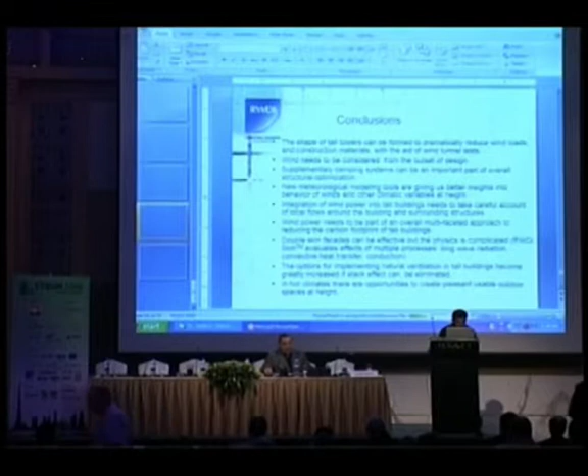Professor Land has formal qualifications in architecture and in city planning. He is a researcher of international renown. He is at the Illinois Institute of Technology, and he directly leads research groups in both the College of Architecture and in the Aerospace Engineering Department at the Institute. So if I could please welcome Professor Land to the stage.

Very interestingly, Peter is very, very experienced in wind in relation to our industry, but Peter was also telling me about his passion for ice yachts. 150 miles per hour, is that right? Up to 150 miles per hour, these things. Now, this is a level of experience, and it's a very interesting thing. I hope that you can incorporate a little bit about your experiences of that and how that relates to the work in our industry. Professor Peter Land.

I don't want to come over as a playboy, so I'm not talking much about my yachting experience, but as a boy I was brought up on a sailing boat, and I've been involved with sailing boats all my life. And since I came to the Midwest, almost 30 years ago, I've been very active in racing ice yachts on the Wisconsin lakes. In fact, I gave up 2 weekends to come here, and I'm missing probably the 2 last weekends of the ice boating season.

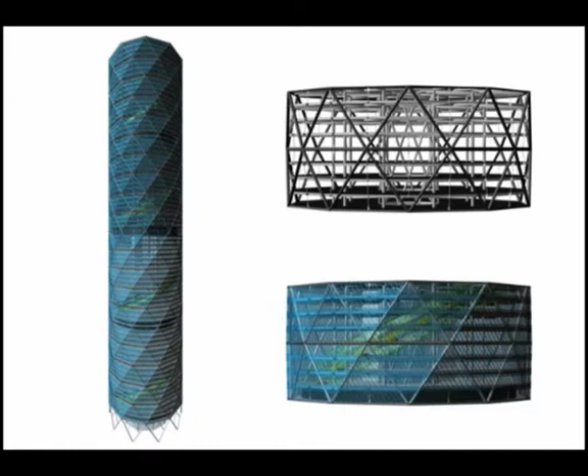So we've applied the loads at the nodes of these inclined columns. If you look carefully, you can see there's a hanger coming down here, and it goes all the way down, and it stops there. So all the perimeter plate loads are transferred to these nodes and distributed neatly throughout the exoskeleton. We thought that was an important breakthrough for this type of structural concept.

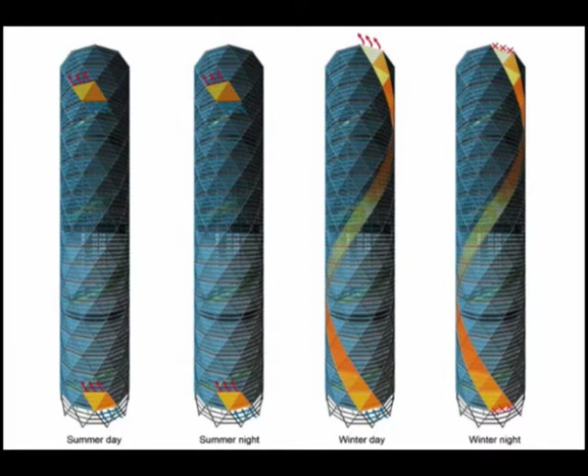And then energy-wise, this is an 80 centimeter to 1 meter double skin facade here, and in that cavity there is a swirling landscaped band, following some of the ideas of Ken Yeang, and the air is guided through the cavity of the double skin and swirls around the building in this fashion. This is a scheme for temperate climates, Chicago specifically.

This would be the temperature build-up in the wintertime. The air swirls around the facade, guided by the inclined louvers inside the double skin facade, which by the way also contain the photovoltaics, which drive the fans, which encourage this air movement. In the wintertime day, the shutters at the bottom of the cavity are opened, which permit the hot air to swirl around, and when the sun goes down, the whole building is encased in a jacket of hot air, and it's closed off in the night, and that will stay at that temperature for some hours. We've calculated.

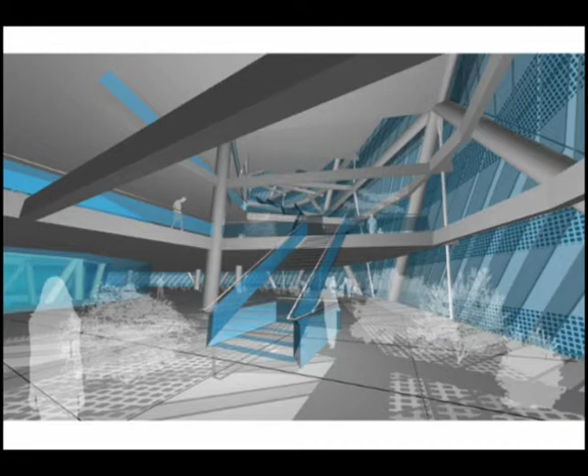During the summertime, you want to shed the accumulation of hot air in that double skin facade. So you open these ventilators, which quickly evacuate the hot air every four stories. Now this shows the photovoltaics on the spandrel panels outside, and also these are the angled louvers, which will also have photovoltaics on them at a decent angle to the incoming solar radiation. You can see some of the bracing inside there. Well, this is some of the many types of experimental structures we're developing.

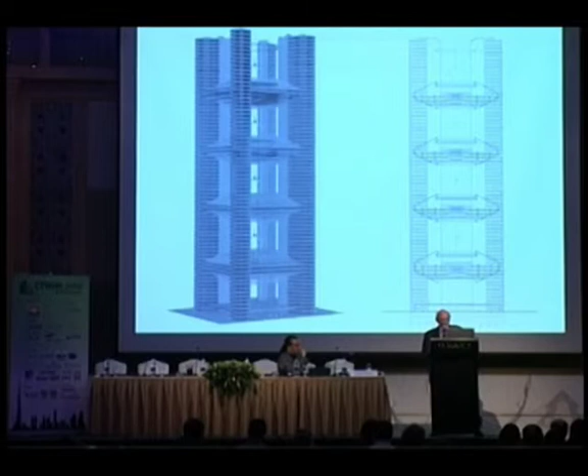Now, getting to what I want to talk about in some detail tonight is this concept of wind turbines on tall buildings. The whole challenge is to shape the building and have a conception for the building which enables the rotors to focus the airflow, to receive the airflow and to work as efficiently as possible. It's very easy to take a conventional high-rise structure and tack onto it turbines of any sort. And it's also easy to design a structure which works when the wind predominantly runs in one or two directions. But the real challenge is the omnidirectional concept.

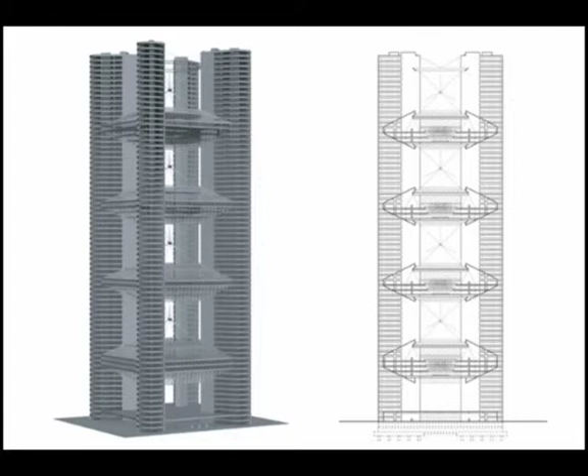And here you see one example of several which we've been working on. It has four corner towers where the principal office space is located, and also what I call flying atria, which enable you to communicate between these four corner columns. This is the section through the flying atria, the corner columns with the main office space and the turbines. This shows the variable airflow direction.

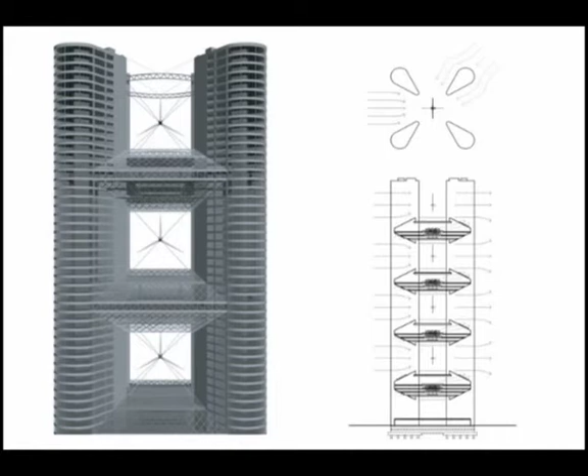The turbines are suspended in the center of this space here by side stays. This is where the yachting technology comes into play. These are side stays which are attached to the structural nacelle of the turbine with all this equipment, and that's the principle of it.

These side stays have motorized end anchors, which you see here, which engage with a rack and pinion device bolted onto the top chord of the triangular torque-resisting truss here. So these side stays can rotate and turn the nacelle enclosing the gearbox, the clutch, the brake, etc., so that the blades of the rotor are always perpendicular to the incoming wind front.

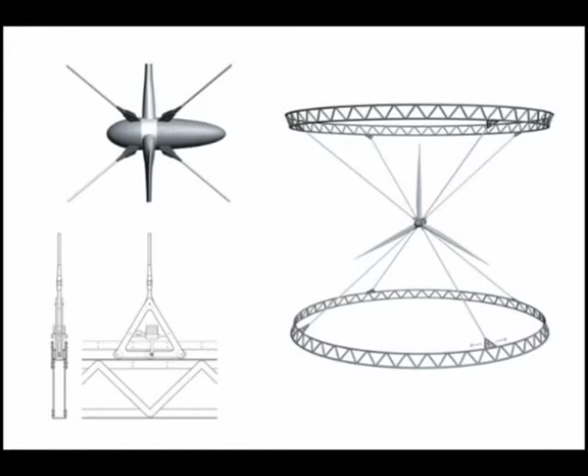This concept is totally omnidirectional. Of course, you have got variable pitch blades here, so you can adjust to the wind velocity accordingly. Now, this is another concept of the same idea. These are the flying atria. This has 3 supporting corner columns. This is the plan here showing the corner columns with the elevators and fire-rated structural nose-shaped form here.

This shows the idea of the wind flow being omnidirectional, being squeezed through this central area, and the wind turbine here. Now, this is a different type of support system entirely from what I showed you before. This is the section with the flying atria and the wind being squeezed through, driving 2 turbines. 4 turbines. No, wait a minute. There's one that's two turbines. This shows the way the wind flow goes through the diagrid of the suspended flying atria.

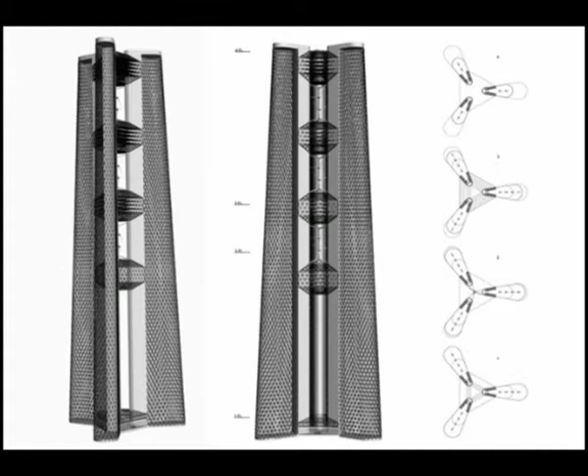Now, this is, you can't see too well maybe, but this shows how the central support column, airfoil in section, rotates and enables the turbine in its nacelle to rotate 360 degrees. So we've got 2 concepts here: a side-stayed turbine housing and the column-supported turbine housing. By the way, each of these schemes will have between 8 and 12 drawings. I'm just taking out 1 or 2 to get the flavor of the work.

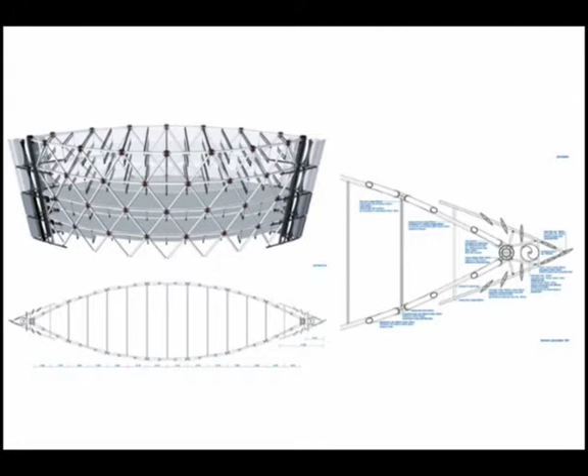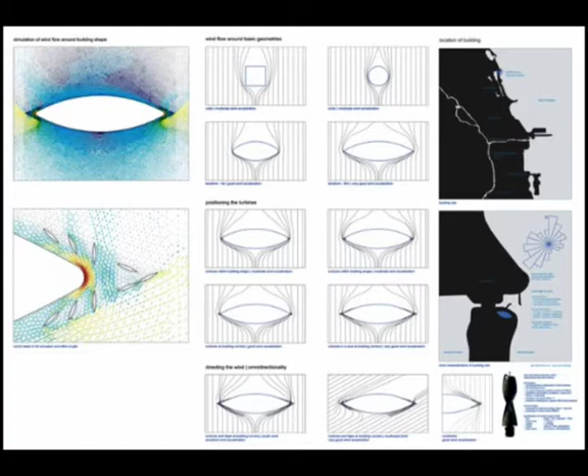This shows the rotor here with this little alternator and gearbox at the bottom. This is a turbine made by Windside in Finland. Now the other side, this shows the wind flow streaming, and there's a Fluent CFD analysis here showing how the wind accelerates over the corner of the platform very considerably. This is just a set of diagrams here to show how the wind streaming is affected by forms of different type.

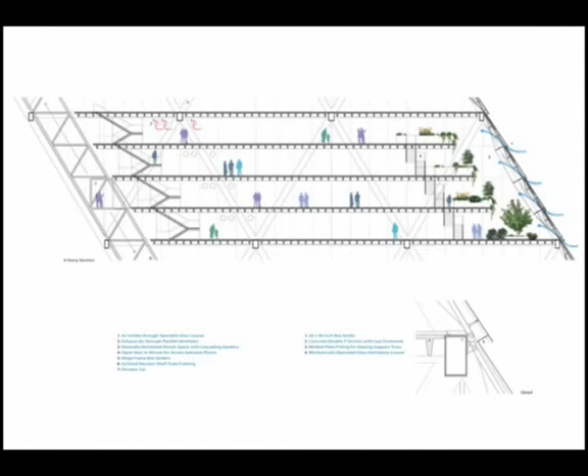These are simply plans showing this. Oh yes, this has another very nice feature: cascading vegetation over the floors inside the towers. So the air comes into the building at these points, and then feeds through this cascading vegetation before going into the office or residential space, thereby, on a summer's day, cooling the incoming air and purifying it.

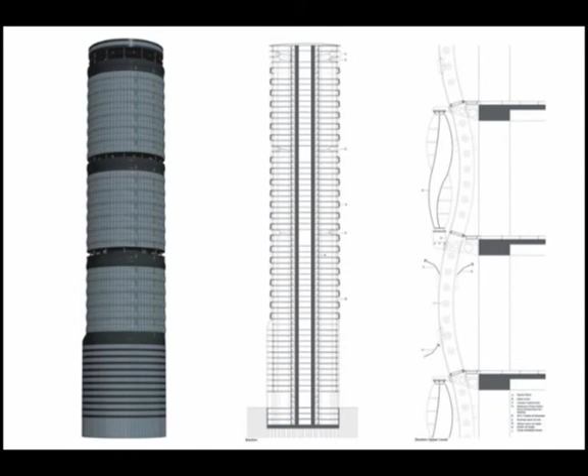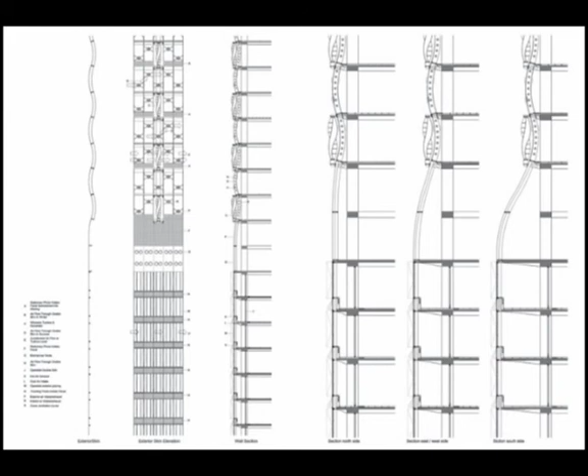So the brackets come out from the facade of the building, and this rotor, which is shaped like the turbine from Finland, is pushed into the valley of the skin. I think it's above something like floor number 8 that the rippling effect begins. By the way, these little circles here are a type of window developed by an architect in Munich called Ingenhoven. It's a very nice window. It's operated remotely and electronically. There's a glass disc which pushes in and out from the facade.

Now, another feature, in this particular scheme we built in a number of features, probably too many, but the bottom part down here, the glass is eccentrically placed on the cylinder of the building, so that on the south side you have about a 2-meter solarium. So on the south side, the air in the wintertime can be heated up during the day, and then at night when the sun goes down, you can open these concertina doors, and the hot air then goes back into the apartment. You can see how the cylinder is eccentrically mounted in this plan.

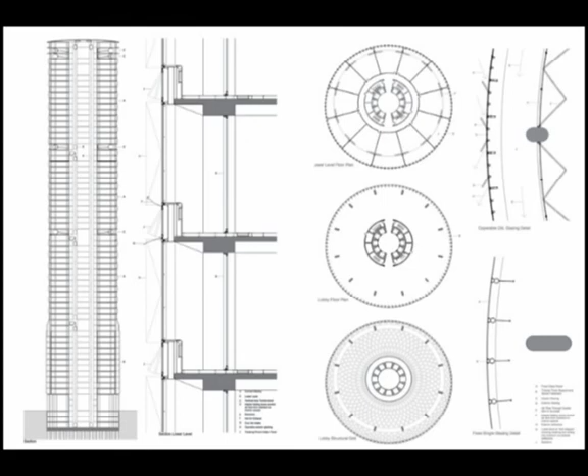I think this might be my last slide. Very interestingly,